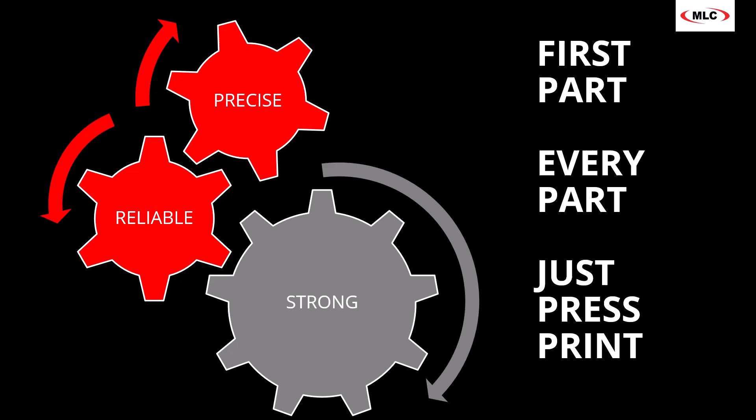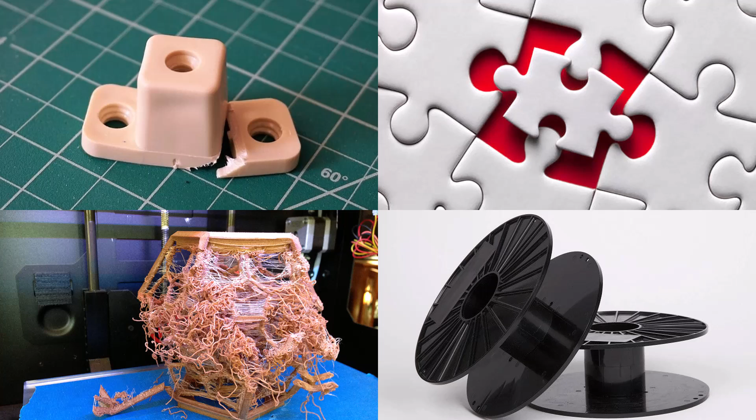And so I'm going to measure my success in this example using time to first part. I'm just making it up, but time to first part. And the first part is not just the first shape I make. I mean the first part that's actually strong enough. The first part that actually fits perfectly without having to go in and tweak the numbers and the size.

The first one to print without realizing I set up something wrong on my supports, or even worse yet, my machine gave me spaghetti, it failed, lost a lot of material, or basically printed and then ran out of material halfway through and the machine didn't realize it. And these problems plague most 3D printing technologies.

All of these do. But what you find is that industrial 3D printing, which is kind of this subcategory of overall additive manufacturing, is used in very specific profit centers, right? Ways that your company is making profit, and they sort of supercharge those activities. And in industrial settings, we don't have time and patience and money to sit around and wait. And so we need the first part to be good.

That's in prototyping, right? I need an accurate representation of the design I'm going to make quickly, with no delay, so I can quickly fail fast, right? R&D needs to be able to learn and adapt quickly. When it's production, we're talking about jigs and fixtures, right? They need to be strong so they can survive production, but a lot of times they're low volume, so you definitely don't want to build them using traditional manufacturing.

But in some cases, you're building things like go, no-go gauges, where the accuracy of that part literally determines the success or failure of all production parts. So accuracy is critical there.

And then we talk about low volume production, where repeatability, reliability, consistency is important, because these are parts where we know the part will function as an additive part, but we don't have the quantities to justify tooling and increasing the production and doing something else. So we're going to use the relatively high cost of each individual part, but you take advantage of the zero tooling effectively, and we're just going to print what we need when we need it.

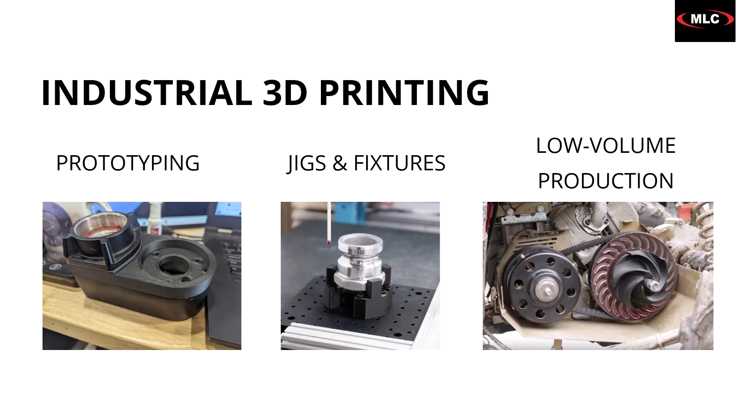These are the applications of industrial 3D printing, and there's three kind of major technologies you really want to look at. So the first one we're going to talk about is SLS, selective laser sintering. Basically, you're using a laser to melt powder. The powder bed, right, the build volume, is filled with powder, which means you can stack your parts in 3D, right? Kind of create a three-dimensional XYZ pattern.

And so if you've got a whole bunch of little parts and you need to make 50 or 100 of something, you can knock that out in no time flat with SLS, right? And the next day, you could have the entire print bed completely full of parts with all these finished parts that are basically ready to go with almost zero post-processing. Great for low volume production, but it also does really good with fixtures and things like that.

And the accuracy is great, plus or minus 0.3%. You probably don't want to try to claim anything more than about plus or minus 12 thousandths. And as the part gets longer, that adapts, but it's a very stable process.

Stereolithography is even more accurate. It's got a much higher surface finish. That laser does a fantastic job of curing exactly where it needs to be with that laser accuracy. Depending on the material type, it's going to affect your accuracy. So for example, something that's a really soft material versus rigid, thin walls versus thick, those all have different considerations, but you're talking plus or minus 0.2% on the accuracy there.

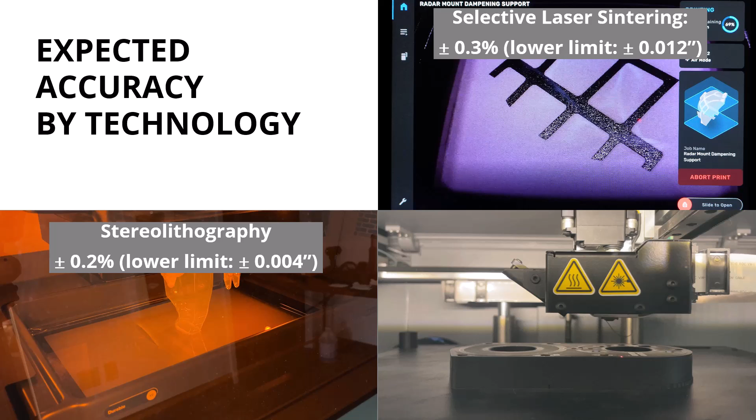But then we start talking about FDM, fused deposition modeling. And I put an asterisk on this one, and it's doing a lot of heavy lifting because FDM is kind of frowned upon for its accuracy in most cases.

So FDM, you might say, well, it's 20 thousandths, right? That's a pretty good idea. But the picture that I have here, that is of a Markforged industrial printer performing in-process inspection with a laser micrometer. Let's talk about what that looks like, because they're taking FDM to places no other company is.

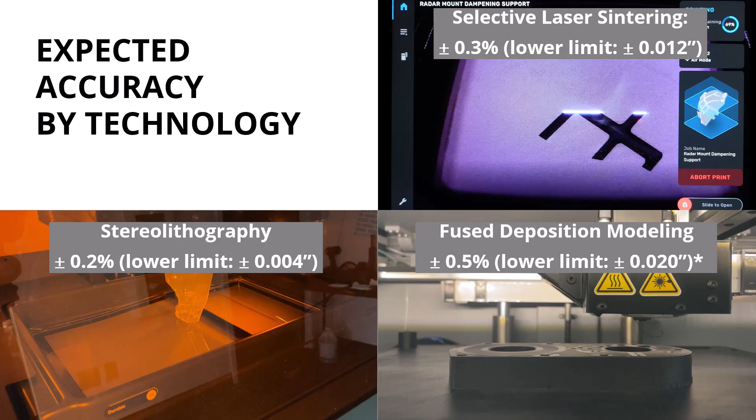Nobody's doing this. So Markforged industrial printers, or they've got desktop printers, they got metal printers, but specifically the industrial series printers come equipped with laser micrometers. Those are used for machine calibration. So if there's any wear or any damage, anything's out of square or something like that on the machine, it'll actually calibrate itself and reverse that wear so that the final part has eliminated any machine considerations. It's also used for in-process inspection.

So you can check to see that the part actually worked correctly and stop it and notify you if there's a problem. So you can take a look at it. And that part inspection feeds back into the slicer, which is powered by artificial intelligence. Now, this has been this way for many years. This isn't just a brand new thing with the AI revolution. The AI-powered slicing takes every part that's ever been printed, and it uses that to train the algorithm. Anytime there's feedback, it's constantly using that as data points and learning.

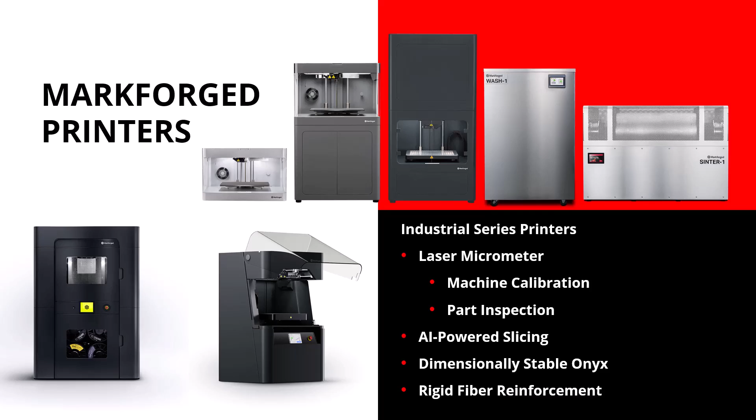The material we use is Onyx. There's a nylon 6 material that doesn't have chopped carbon fiber in it, but if you put chopped carbon fiber in, that's what we call Onyx, and it's extremely dimensionally stable. That's why it was actually developed. You'll see now that most people have something similar to this, but Markforged was really among the first by a number of years building with this very stable fiber-filled material. And then if you want even more stiffness, rigidity, dimensional accuracy, you could put fiber reinforcement in there. Now, we're not going to do most of that. We're just going to take advantage of the basics, and we're going to go and build a part.

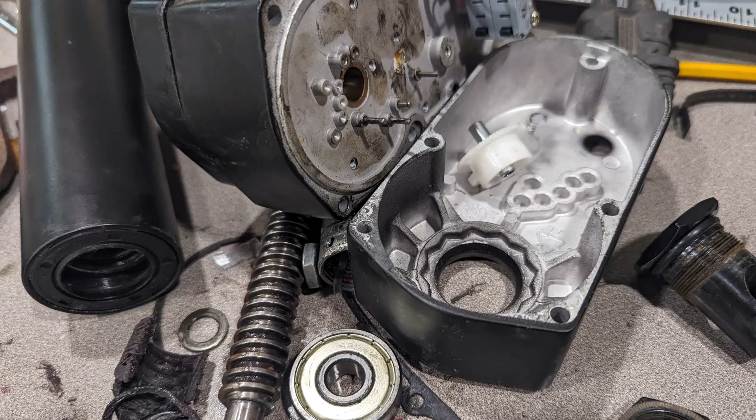And this is my kids and my tractor, and specifically, we're going to be building this part here on the front of this tractor. So this is a grapple. It's used to pick up brush and logs and things like that. It's got jaws that open and close. And that actuator right there, it broke on mine. It's a 12-volt actuator, uses an Acme thread inside with a motor. And when I opened it up, they told me it was not serviceable, so I just ripped the thing apart and figured out what happened. There's a plastic Acme nut in there, and it stripped all those threads out. So I'm not okay overpaying for something that's going to break and is completely unserviceable.

I'm going to bring my own to market, right? I'm going to start with a similar design, and I'm going to try to build as quickly as I can and iterate as quickly as I can any parts to replace and get it back in service. So challenge number 1, this is our challenge for the day. I want to build a functional prototype of this part by tomorrow. That's a really fast turnaround, but that really underscores time to first part. I want a part that's fully functional and ready tomorrow. And by that, I mean it's strong enough, it's the correct accuracy, all these things.

And there's 3 major problems with the request of a functional prototype. Everyone can make something that looks pretty, right? A little benchmark boat. But this one has extremely tight critical tolerances. It has a dowel that needs to be press fit in. That's going to have an extremely tight tolerance and a very specific type of fit requirement. And it also has some very fine threaded holes that need to be structural. So let's do this. Let's go build this part.

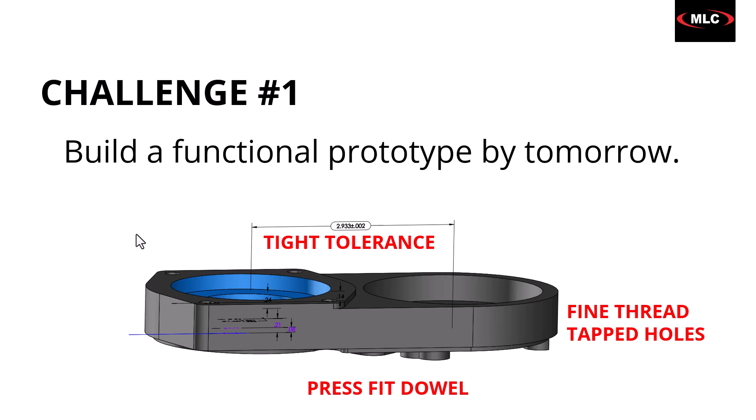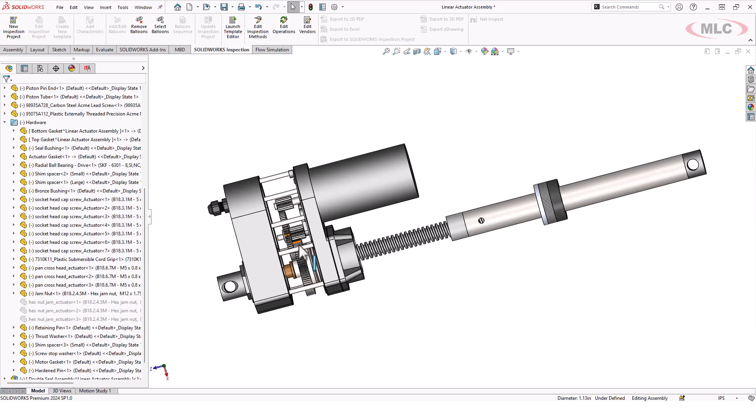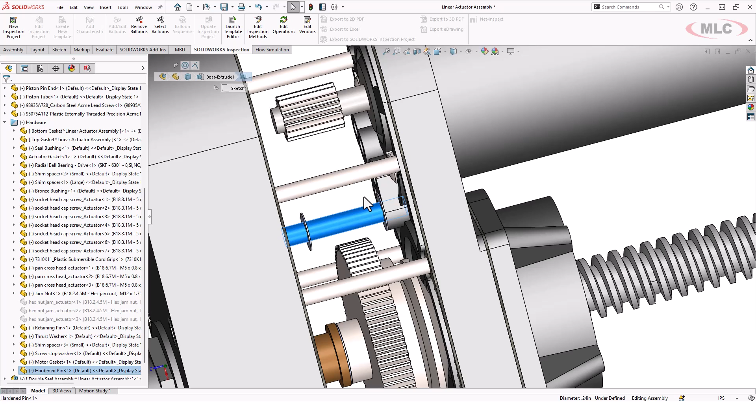And so I'm going to jump into SolidWorks. And here is the assembly that this goes into. If I grab this actuator, you can see here's how it goes in and out. This is not hydraulic. This is mechanical. There is an Acme screw in here that spins. This Acme screw is driven by a gearbox down here. This gear has a clutch on it to keep it from stripping out this part, which, of course, if something lands on it, it strips it out anyways. So that's going to this gear stack and then to the motor. This gear stack is on this dowel pin, and the dowel pin is a press fit. So we want it to be a very specific type of fit, so that it fits correctly, it holds accurately and evenly, and it doesn't split the material.

So the center to center spacing between these two bores, between the motor and this shaft and even that pin, those are all really critical. So we got a lot of work kind of cut out for us. So this is the part we want. This part is going to eventually be die cast, but we're trying to make something that will be functional long enough for us to do sort of our prototype testing. So Onyx is going to do a great job for us.

So remember the three concerns we had. The first one was this hole-to-hole spacing. Markforged industrial printers claim an accuracy of at least plus or minus 0.2%. That's the same as the stereolithography, but it actually can go as low as 0.1%. So if you look at basically 3 inches plus or minus 0.2%, that's 6 thousandths. So we can't hit plus or minus 2, but we can hit plus or minus 6.

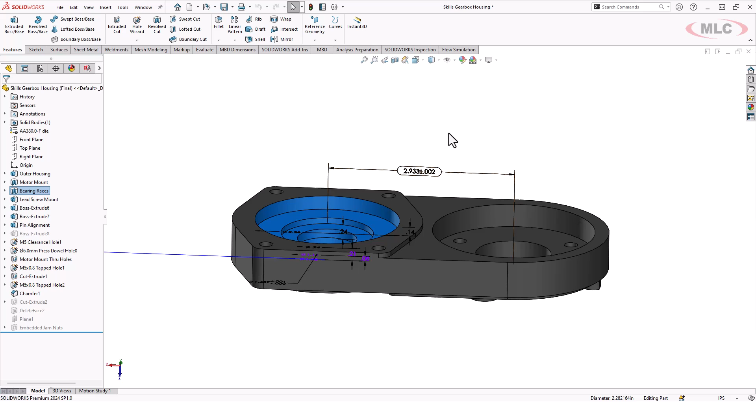Now, is that going to work for us? Probably, right? In prototype land, if you're off by a couple thousandths, you can shim it, you can kind of jiggle it, right? But in production land, that's not acceptable. I need everything to always be right every time. So this is going to suffice for what we're trying to do, but it's not perfect.

The other tolerance we want to look at is this tolerance that we have on these press fit dowel pins. So it's a 6 millimeter hole for a 6 millimeter dowel. Now the dowels are really accurate, right? They're ground dowels. And so normally if you were pressing metal into metal, you'd need a very tight tolerance to be able to accommodate that. Well, in this case, there's no way we're going to hit 3/10,000ths of an inch up and 4/10,000ths of an inch down. We just can't get there. But we can hit a fit that we need.

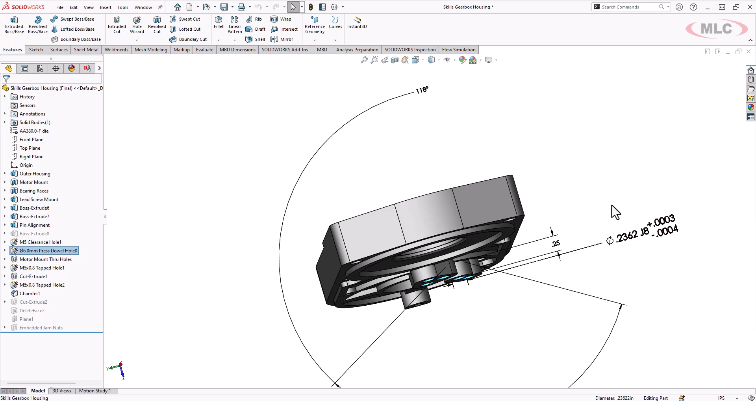So if you think about a fit, right? Think about it like a clearance fit where it's free to move, loose fit where it's like jiggly, friction fit where you stick it in and then you can turn it with a certain amount of friction, and that friction has kind of a range of values. And then you've got interference fit where you're actually just pressing it in and it's clamping that thing down. You got a lot of range of behaviors, and this dimension was for metal. What do we need? What size of hole do we need for 3D printing?

And furthermore, when you specify a tolerance, normally what you're doing is you're doing it either as an inspection tolerance or you're telling them what type of process to use. So +3 and -4/10,000ths, that's probably a reamed hole, and that's perfectly acceptable for a CNC machine. We can't do that with additive. You can't just sort of go in there and finely add material to that. You either have to overbuild, underbuild, or aim at something different.

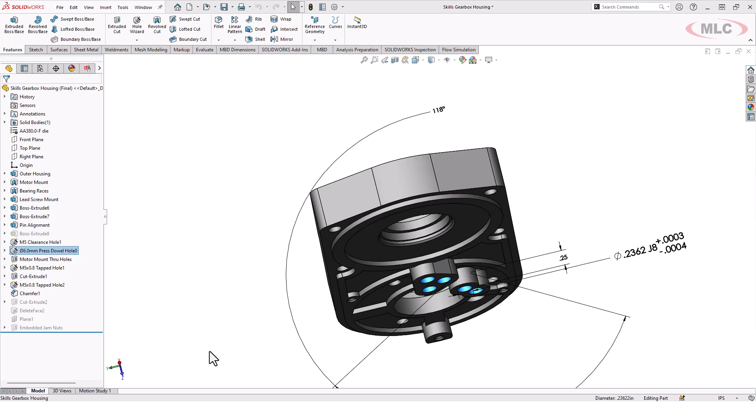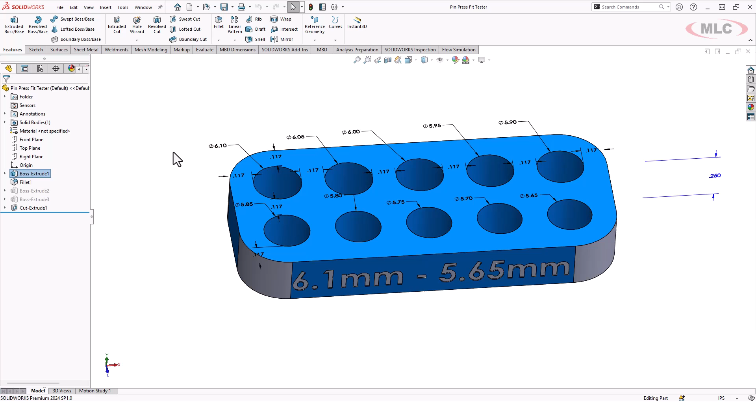And so in order to do that, what I'll typically do is build something like a fit tester. So this is what a fit tester might look like. This is the one I actually printed for me, and it has every size of hole that I think might be the right size of hole for this part. I don't know exactly which one's going to give me the best result, but I know if I print all of them, this is a tiny little part.

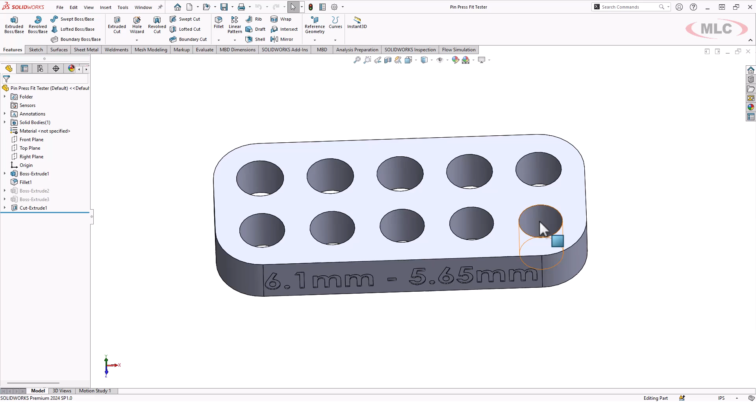If I print all of them and then I sit this on my desk and I just sit there and play with it, I can say, okay, well, this one's loose. This one is free, but it doesn't wobble. This one is that. And if I print this and leave it sitting on my desk, I can always refer back to it and say, okay, for this next one, let's go like 2 steps tighter, right? The friction wasn't quite where we wanted it, so let's go from here to here, right? I got a range of values. It's almost like a thread gauge, but this is for press fit.

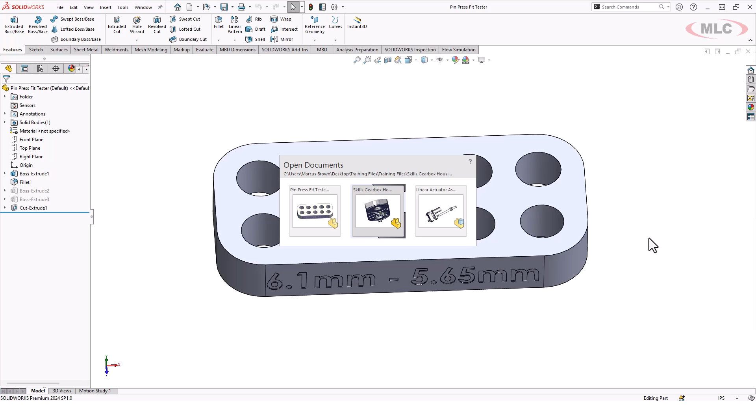And so I can print that and then very quickly grab it off the printer and go and figure out what size I like. And when you come with 3D printing, nominal size is what matters, right? You can make asymmetric tolerances and a CNC machinist will just figure out how to hit the middle of that tolerance range. But with 3D printing, it's all about that nominal dimension. So here's what I'm going to do. I'm actually going to create a new configuration, call it 3D printed.

And this 3D printed configuration is specifically going to have a different nominal dimension than the rest. That nominal dimension, I'm going to say show custom sizing. So instead of it being 6.0, I'm going to say it is 5.85 millimeters. That's the hole on my desk, on my unit tester, that fits exactly the way I want it with the right stiffness from bending, and all that kind of good stuff.

I don't necessarily have a tolerance on that, right? I know what my machine is capable of, but I also know that if I just tell it 5.85 nominal, I'm gonna get what I want. So it's kind of weird. You don't actually end up using tolerances with 3D printed parts. You may for inspection acceptance criteria, but you're not actually going to be able to adjust your parameters to hit this size. It's just going to print what size it is. You're responsible for the nominal dimensions.

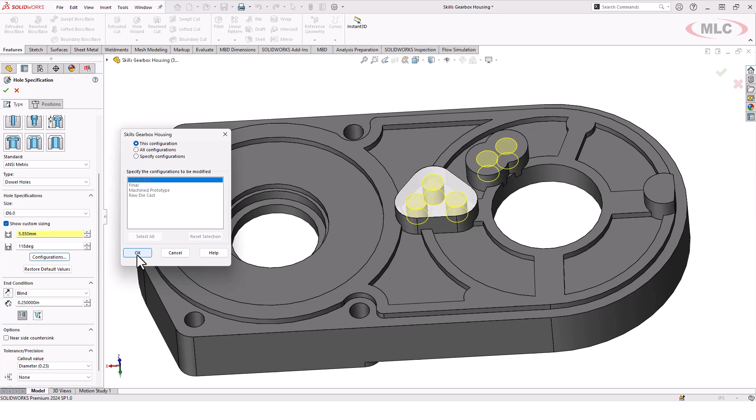I'm going to say this configuration only because I don't want this 5.85 dimension for all configurations. I even turned off the tolerance so that it's very clear that in this configuration, that's the dimension we want. That's the nominal dimension we want, and we expect the final fit to be achieved. We don't actually know what dimension that's going to key out to be, but we know it's going to be a very repeatable dimension as long as it's printed in the same orientation.

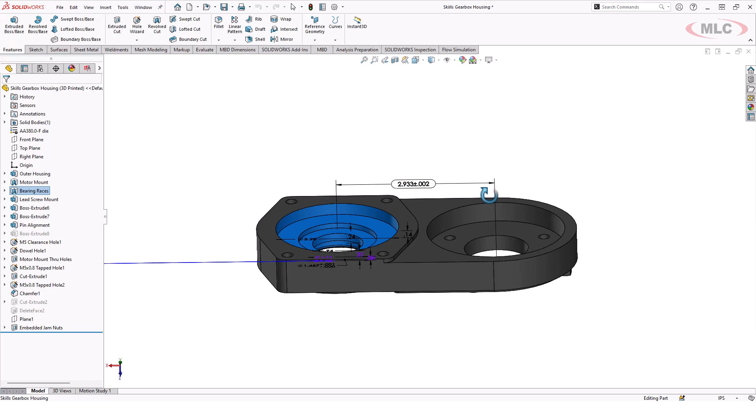So we've got center to center spacing tolerance here that's going to be close enough. We've got a fit here that we can't hit the tolerance, but we know we're going to achieve the end result fit we need. And then the third one is those fine thread tapped holes. And so for fine thread tapped holes, typically what we'll do instead is we will come in here and embed hardware. So I've created some hexagonal void cuts here. So they're inside. You can't see them from the outside.

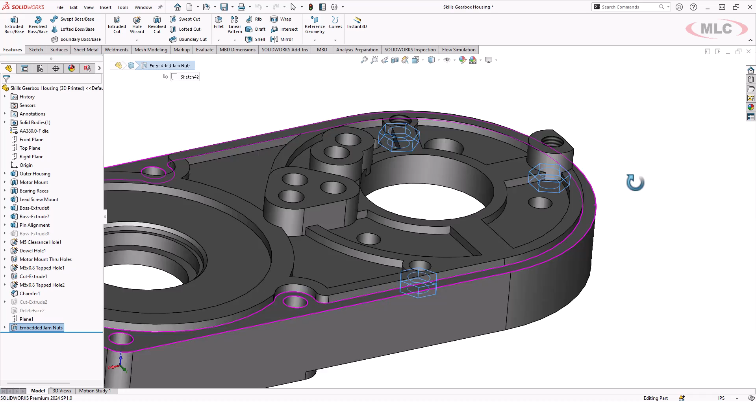And those are the exact size of M5 jam nuts. And we're going to print, and then when it gets to the top of that layer where it's got the perfect shape void in there, we're actually going to insert hardware into the parts, print around them and encapsulate them, creating fully functional, full strength threads in effectively a plastic part. So let's do that. Let's see what that looks like.

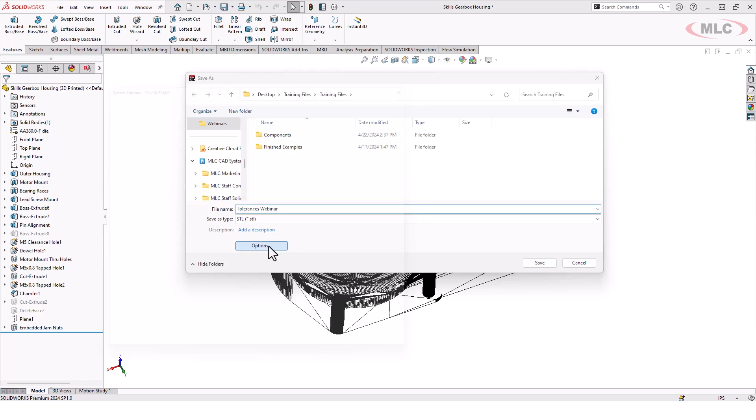Let's get it over to the slicer. To do that, we got to save it as an STL file. So I'm going to do save as, and I'm going to say that I want to save this as an STL file. And we're going to call this Tolerances Webinar. And before you hit save, you really want to make sure to go into your options for STL files, because STL files can be saved in different types of resolutions, right?

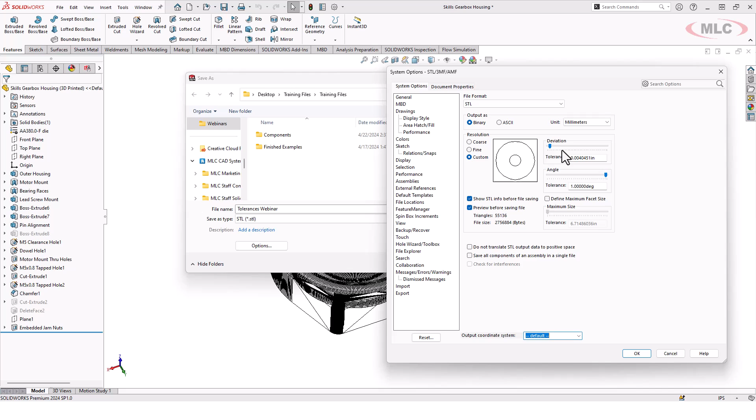CAD geometry is analytical. Circles are actual circles, flat faces are actually flat, but an STL is a series of flat triangles that approximates your curved part. And so what we recommend is you set deviation. So if you want a really coarse part, that'll create almost that tessellated effect where it looks like triangles. It's kind of a cool effect, not what we're going for here. I could do fine, but that's kind of arbitrary.

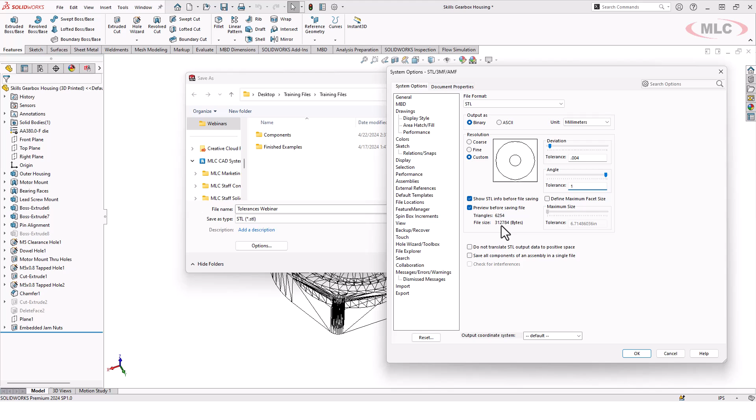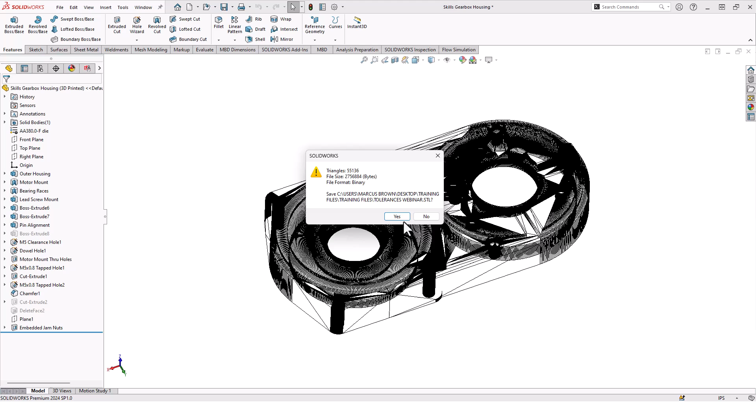And so what I'm going to do instead is I'm going to say custom, and I'm going to give it a tolerance of about 4 thousandths of deviation in linear, and then about 1 degree deviation in angular. And that's going to give me a part here of a certain size, and that's what I'm hoping for. Now you can change that in any way you want. If you want it to be more accurate or less accurate, just keep it under about 20 megabytes. That tends to be the sweet spot for performance. But this is going to give us a great job, and it's only about 3 megs, so we're doing really good here. So I'll click yes, and it's time now to go and slice it.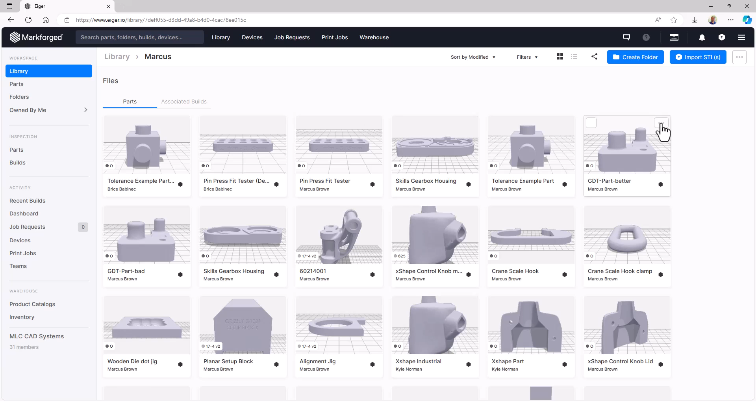So we're going to slice in Eiger. Eiger is the online slicing software, so you don't have to install anything on your computer. All you have to do is just log in and upload. If you're in a secure environment, you can use an offline version, but all we've got to do is say import STL, and then we'll go grab the file that we want. And we can bring in multiple ones, give them a name. This is our Tolerances Webinar part. We're going to do it as an industrial printer part made out of Onyx, and we're going to add it to my personal folder.

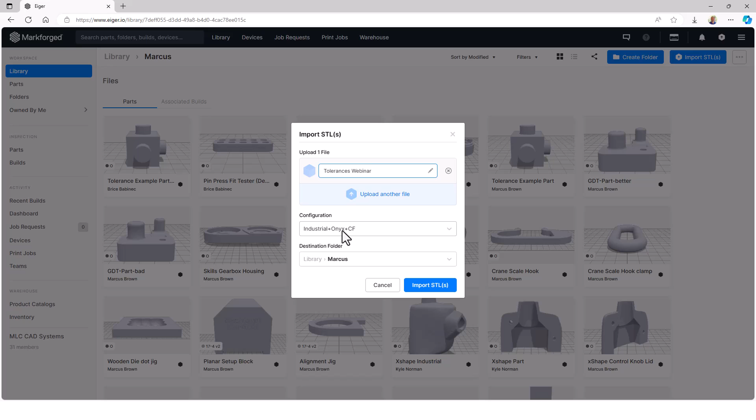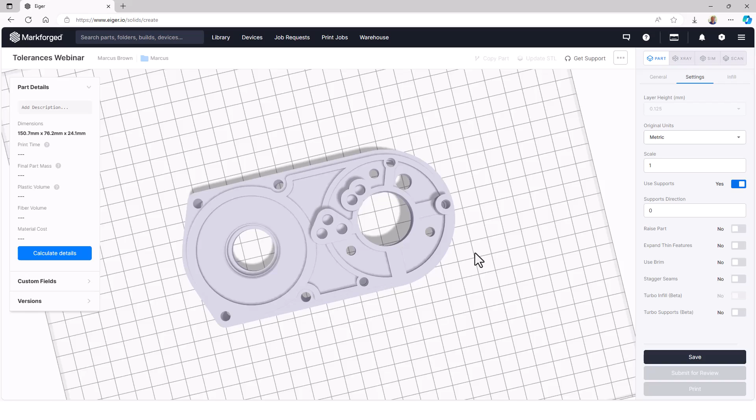So we'll import that STL and see how it looks. Now, a couple things here. The guys always tell me to set the units correctly. I never do. So I have to go in and say, this is metric or imperial to be able to get it the right size. So if it ever comes in just super off on your size, get in the habit of saving out the correct units or update that.

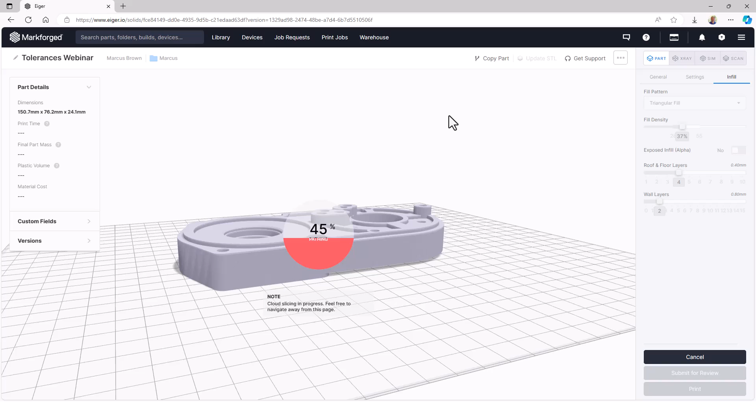But for this part, I don't want any carbon fiber because I want to go as quickly as I can. The Onyx should be strong enough. We'll use the rest of the defaults and we'll go ahead and hit save. So what we're going to get is a fully sliced model that's going to figure out where all the slices go, how the print head needs to move in order to achieve that and build up that layer by layer. And it's going to give us an estimate of how much material it's going to take, how much time it's going to take to print. Lots of really great helpful information, and we can kind of make some decisions.

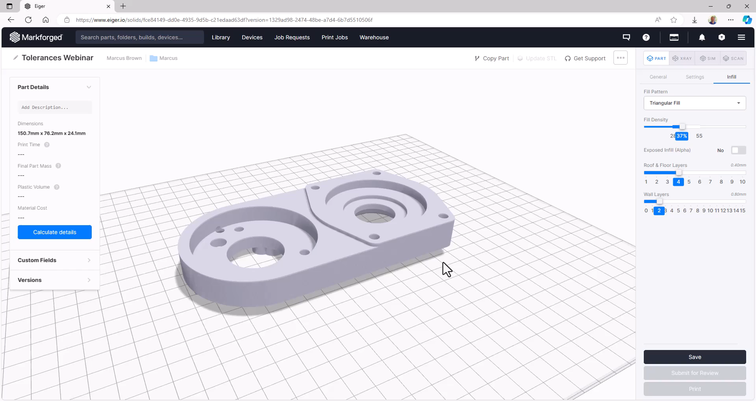So this part's going to take about 14 hours and cost a little under $20. So not too bad. Now, if I was to, let's say, flip it over, I can check and see, is that less expensive or more expensive? It is going to change which direction is up. It's going to change kind of the surface finish results we might get. So definitely kind of play around with the part.

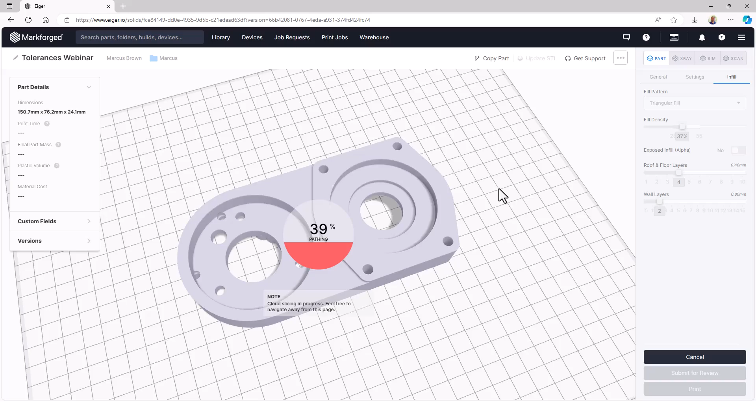I may want to do it on its side, but for this part, because of these round holes, I want to keep those in the XY plane. This is going to be the orientation, either this one or the original one that it came in. And if we look at it a little bit, we do have these hex voids that we're going to have to deal with that may be easier the other way around. Looks like the other way was a little bit cheaper. I'm going to go ahead and use that one.

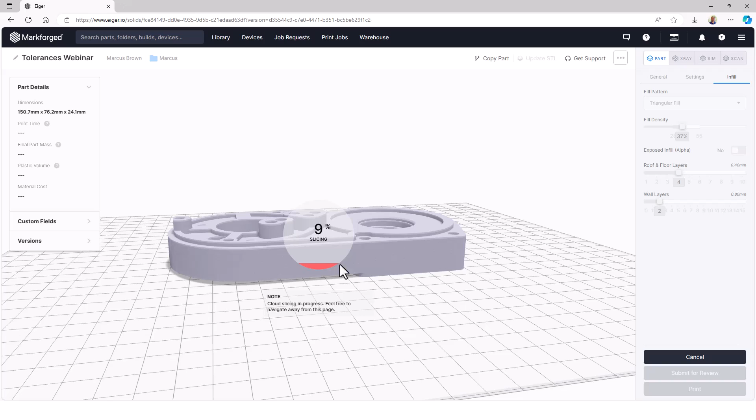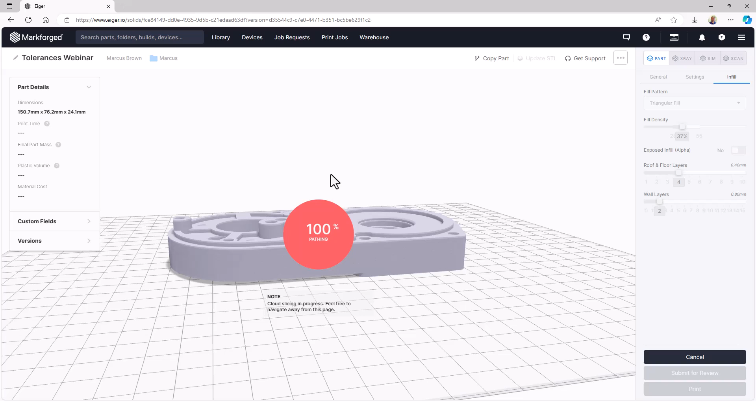And then we're going to go into the X-ray for this part because I want to show you what we're going to do to deal with those embedded pieces of hardware. It's going to print, and we need it to stop when it gets to the top of that hexagonal void, so that we can drop that hardware in there. And so we have to establish that. Also, because that void has a floor and a ceiling, there are going to be supports automatically calculated for those. We need to turn that all off.

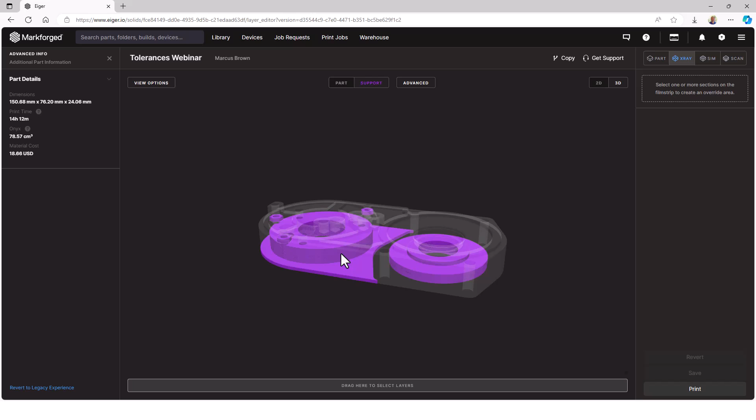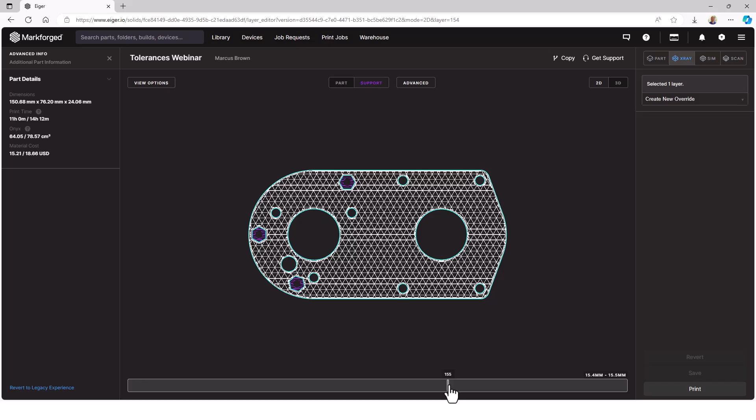So here's the plan that we get, basically. And everywhere you see purple, that's where the supports are. And you see there's supports in these hexagonal areas. This other support, it'll come off pretty easily once we're done. But let's go into the 2D mode and look at each layer individually. And as we scan through the layers, you can see how it's going to approach things. It's a really nice way to look at really small detailed parts to see where the supports are or where the various different lines are going.

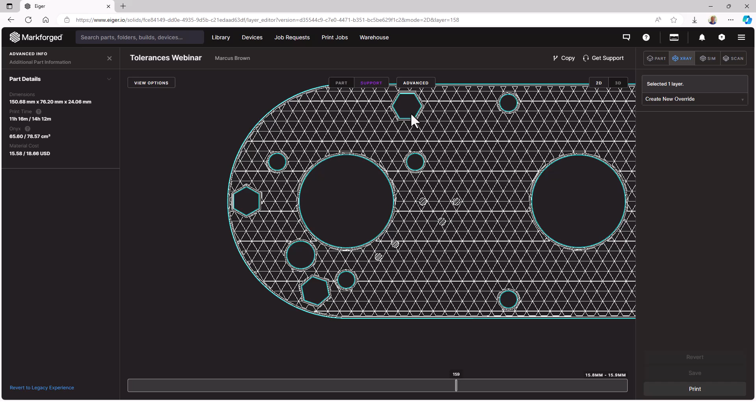But my main concern is these hexagonal openings right here. This layer is the very top layer that's open. I want to pause after this layer, so I'm going to create an override and say insert a pause. I'm also going to come in here and find the bottom of these voids, which should be right about there. That's the very first layer where this opening exists, right? The one right below it is the floor.

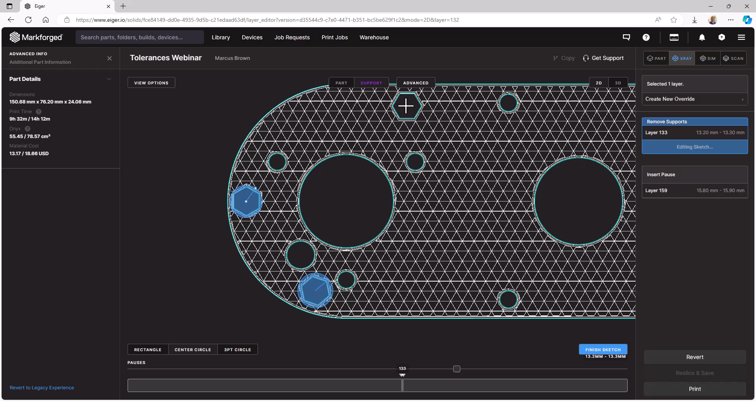So right there, that's where it's going to start building up supports to hold the ceiling. Well, there's not going to be a ceiling when we're done. So I'm going to tell it to remove supports, and I'm going to have it add a sketch. And we're just going to sketch in these little areas right here. This one, and this one, and this one. These are the areas where we don't need any supports. So I'll say finish my sketch. And then I'm going to pull that up to about there, which should be the full height of those voids. And we'll check and see what that does.

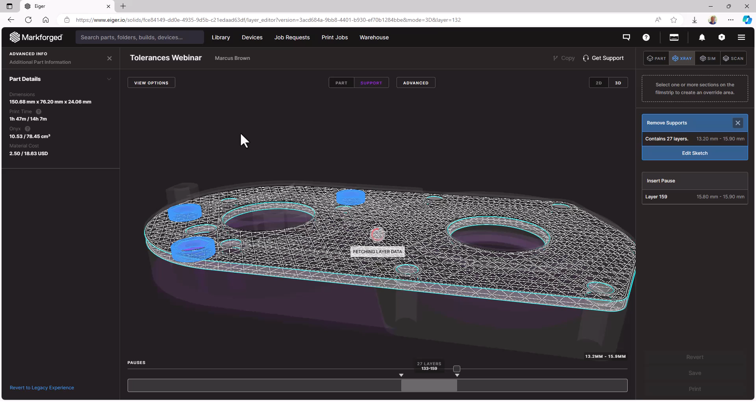The slicing is all being done on the cloud, so it does a pretty good job of going very quickly. Even if you're doing it on your phone or a Chromebook or something like that, it doesn't really matter. So once it goes through and slices, it's going to give us a new estimate, and it's going to give us the new plan. And hopefully we'll see that there are no more supports in those hexagonal areas.

And we're going to get a nice pause feature right at the top of those. So that's looking good. The material costs are $18.63 still, so not really anything there. So the part is now sliced. We don't really have anything else we can do in terms of accuracy, but there are things we can do

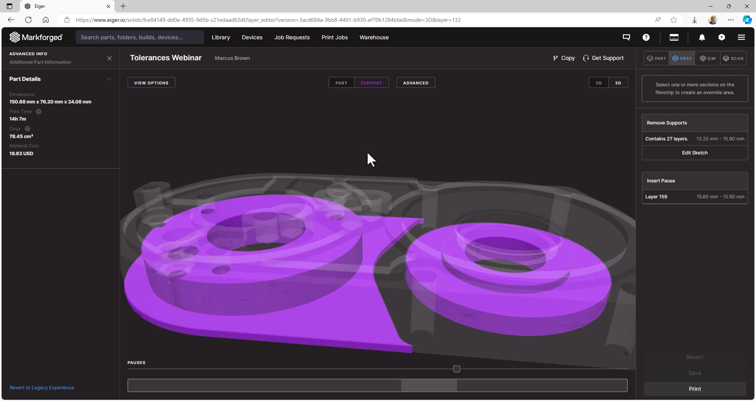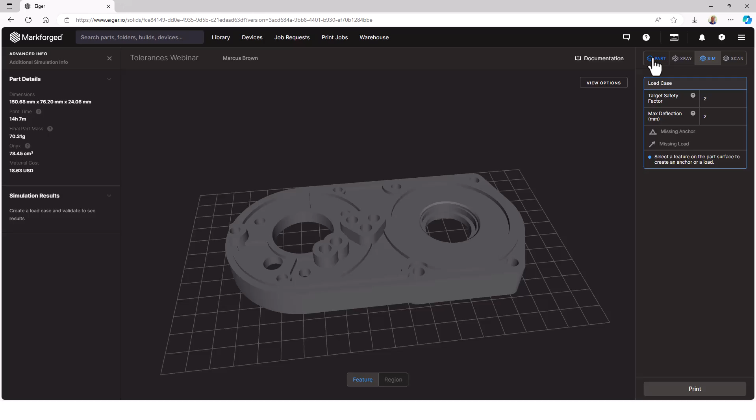in terms of strength. Now, Bryce Babinick did a webinar on simulation recently where he showed how to take and apply a very specific load case to a part to see whether or not it's going to be strong enough. But I don't have a specific load case. Right? I've got some idea of how it's all going to be loaded up, but it's going to be stacked in with a bunch of other parts. I don't actually care about a very specific load, but I do want it to be stiff.

So for those of you that are familiar with FEA, this is running just a linear frequency analysis, trying to figure out the fundamental frequencies of this part, and then it's making what-if scenarios and creating advice for ways that it could potentially improve the strength by just changing a few of your settings.

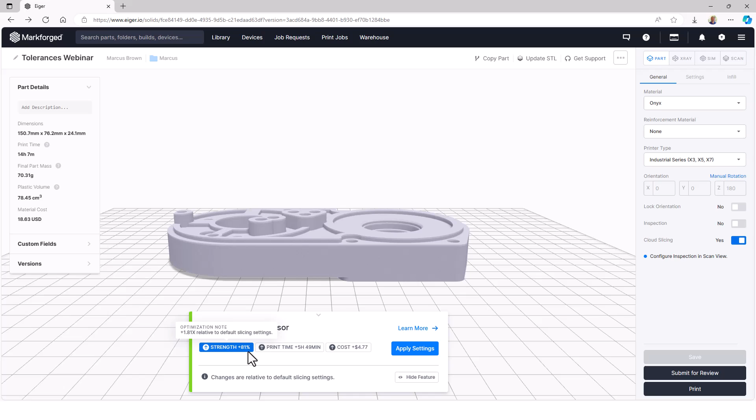So I sped this up just a little bit so you could see, but the settings that it recommends are to improve the strength by 81% while increasing print time by 5 hours and cost by about $5. So what I can do is see what those settings are. And so what I'm going to do is hit Apply Settings, and you'll see that it took my wall layers from 2 to 8. That's going to give us this additional strength.

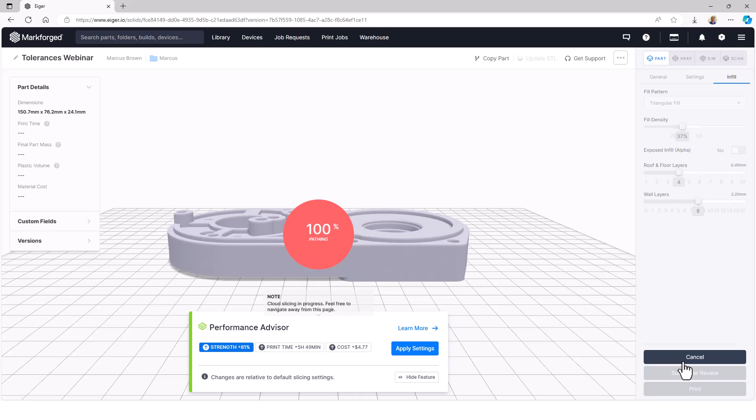So I'm going to go ahead and hit Save on that. We're going to reslice it and find out exactly how long it's going to take for this new design variation. All right, so we're still at 20 hours, so this is going to be done definitely by tomorrow. But the last thing I want to do before I go ahead and hit Submit for Review or Print, depending on how my systems are set up, I'm in R&D, so I'm just going to hit Print because who cares. But I'm going to turn on some scan settings.

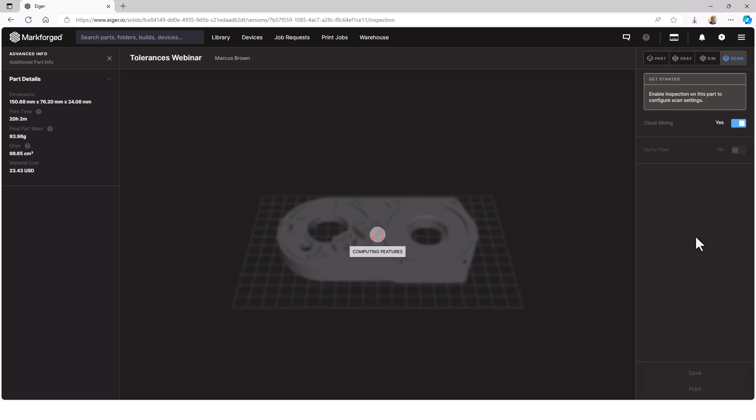And with scan settings, what this allows you to do is scan intermediate layers to be able to see what the tolerances are. And the reason we're doing this is I don't want to have to put this part on a CMM to validate that this is an accurate representation of the design that I want to use in full production. If this fits and it's the right size, then I know that my design is good. If it fits but it's the wrong size, it doesn't do me a whole lot of good. I mean, I can continue testing, but I've got to go fix that for production.

So I'm trying to create not just a functional prototype, I'm trying to learn whether or not my design is going to be suitable. So I would turn on this X-ray inspection if I wanted to. I'm not going to turn it on for this particular one because I've already printed one and we ran through and got the finished results. So let me show you what that looks like.

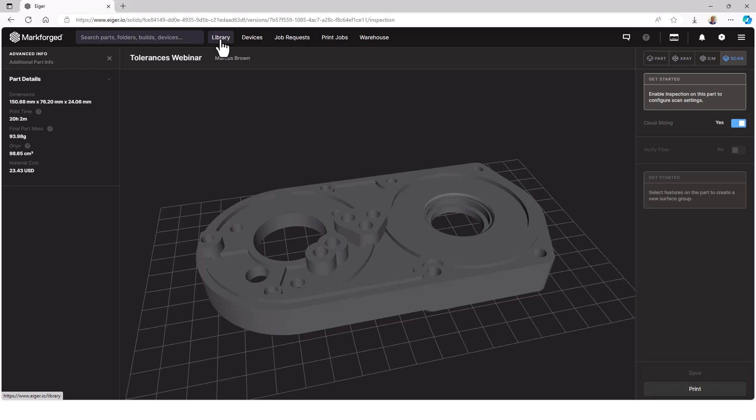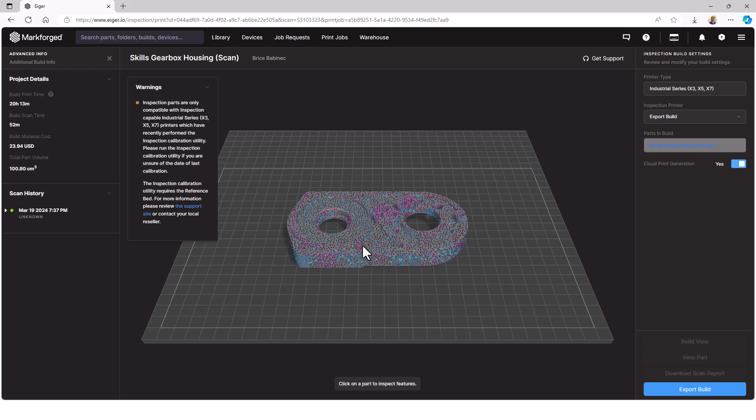On my builds, I want to show you the very first part we ever made for this design. And so that is this guy right here. The rest of them, we flipped them over so that we could print them the other way because the surface finish looked great on the bottom here, but this is not exposed. And so it ended up giving us a really nice finish interior and not exterior. So we flipped it for the rest, but this is the very first one off the build.

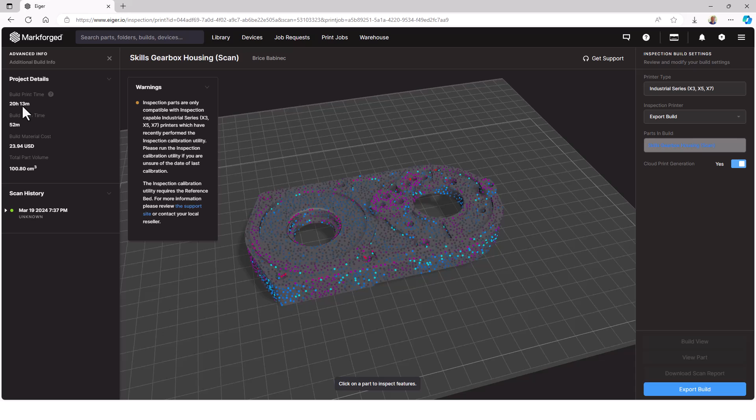We printed this back in March. And what I can do is actually take a look at the build time, the material cost, but I can click on this part and actually start inspecting it as if I was using a CMM. So remember this hole right here, I can come in and click on it and find out what my surface area is, how much data I scanned off of it, what's my radius, right?

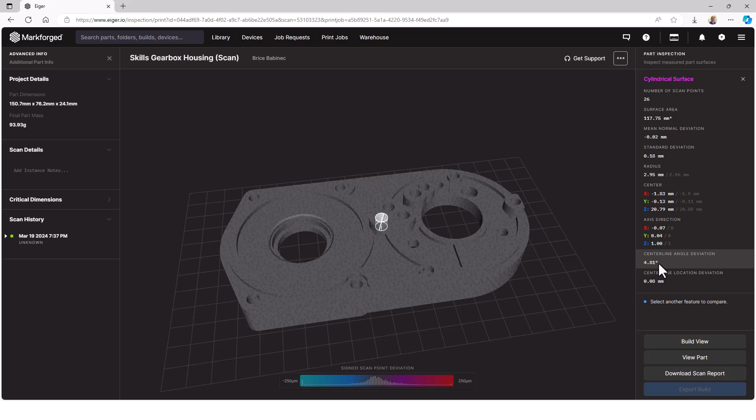Nominal versus design: where's the center, where's the axis direction, where's the angular deviation of that part. 4.8 degrees, that's probably about reasonable as far as the angular deviation. Luckily, this has a mating part on the other side that's going to hold on to it, so that deviation is going to kind of get pulled out of it, so it shouldn't be a problem.

Let's take a look at our spacing, our hole-to-hole spacing. So I'm going to say from this surface right here to this surface right here, I want to know what the distance is. The center to center distance is 74.49 when it's supposed to be 74.51. So we're 0.02 millimeters off in terms of our center to center distance.

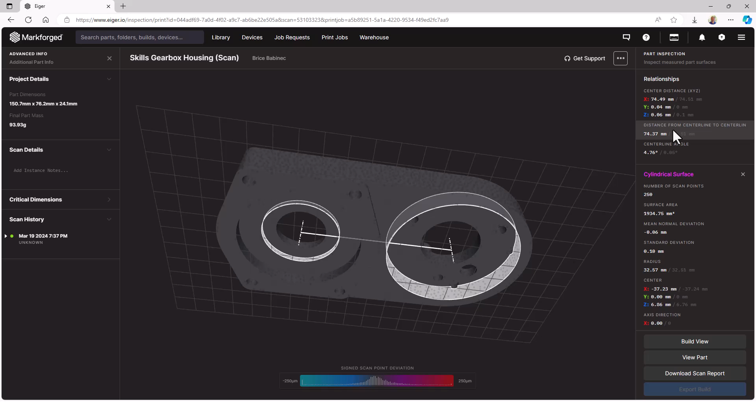We can take a look at the center line angle and everything else, but what we end up with, remember we said we wanted plus or minus 2, we expected plus or minus 6 thousandths, we're actually getting plus or minus 5 thousandths. Actually minus 5 is what we're getting in terms of that center distance. So we're able to very quickly grab that information.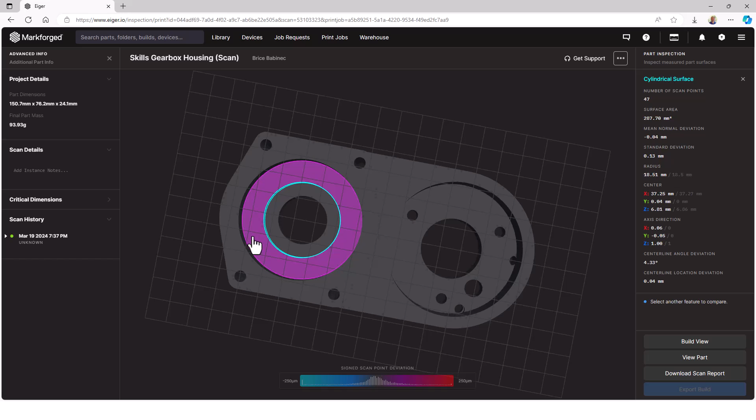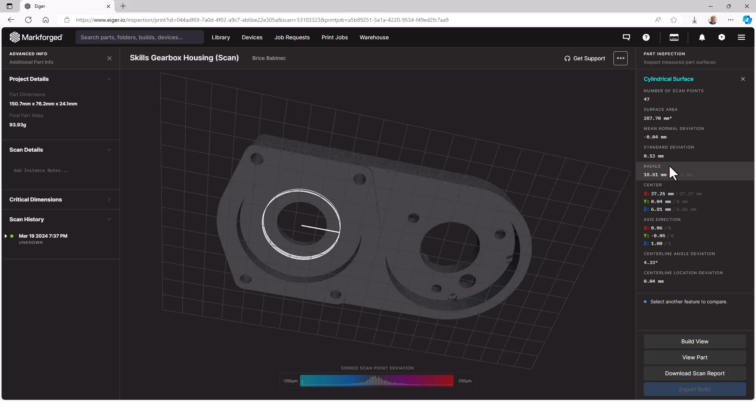And finally, the really tight tolerance part here, this is the +1 -0. For this one, it says mean normal deviation is minus 0.04 millimeter, and it's at 18.51 millimeter versus an 18.5 nominal. 0.01 millimeters is the amount of deviation and variation we have. And so I'm feeling really great about this part. If this part functions correctly, we're going to be able to use this really effectively to do our testing and to validate that our design is suitable.

Now, one of the things I did want to check was kind of the general trend of accuracy. And so we did print several of these for the various different events. And if you take a look, they do vary up and down, but generally stay within that range. The offset and the correction that the AI slicer does is not immediate. It's not like you print one and it's 5 thou over, and so the next one is 5 thou under, right?

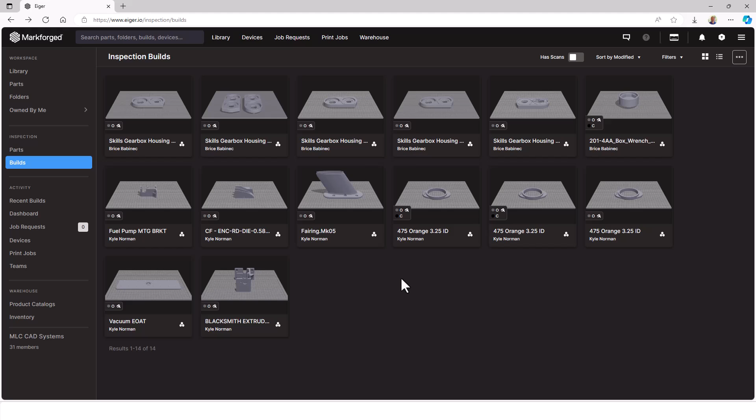It's going to sort of try to dial that in over time, but the more times you print a part of a certain shape, the more it's going to try to dial that in and give you more and more accuracy, and that accuracy will improve over time, which is kind of a crazy thing to think, that your part is always going to be more accurate over time than when you first started printing with it. So here's a little bit more of that footage of it actually printing so that you can kind of see what that looks like.

And so here is the finished part. This is part number 1. Part number 1 has those 8 wall layers that were recommended by the performance advisor. And if you try to break this, I can't even see it moving, and there's no fiber in this. This is just the Onyx material. That extra wall layer, those extra $5 were absolutely perfect for this part.

It's kind of hard to see, but there's some threads in here from those jam nuts. So they sat inside this really thin part, and they gave me a very structural hold on this. The spacing is good. That tight tolerance for the bearing, it actually fits and holds beautifully. Same with the press fit dowel. Everything's exactly the way I want it.

So I don't think anyone is diving to the depths and the complexity of controlling their processes, of controlling their slicing, of controlling their materials and everything else to achieve this level of accuracy, right? Every system, every manufacturer continues to push the envelope. Formlabs released the Form 4 recently, which prints extremely fast, accurate, and large parts.